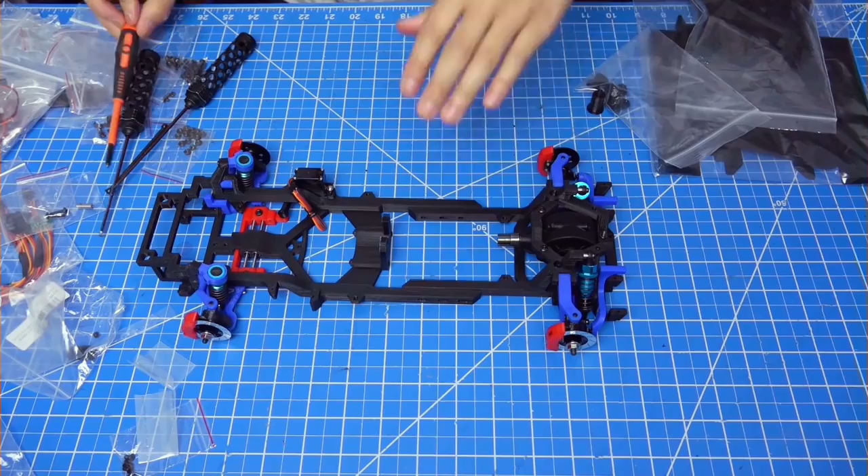Put the shorter ones in the front. And we're gonna have to grease this area right here.

Okay now guys, I'm gonna have to cut the body so that I can use it to measure where things should be. Oh, and I just printed out bucket seats. Somebody made this and put it on Thingiverse, so I'll put the link in the description.

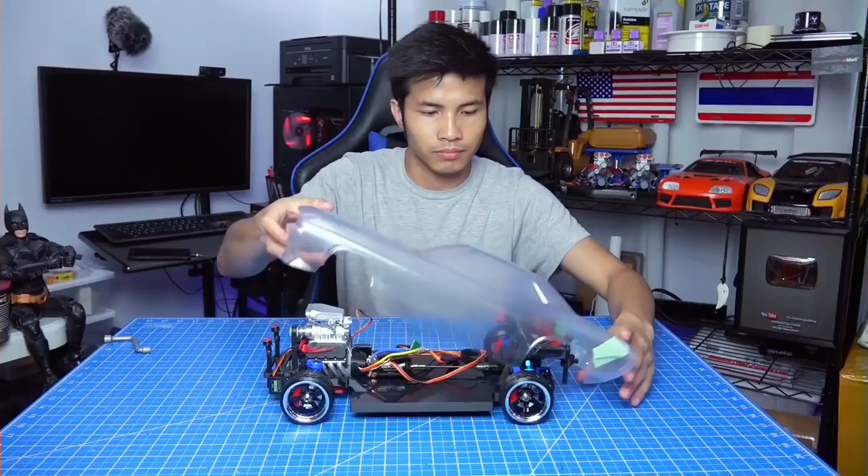This one's easy. I'm gonna warm this up with water. Perfect.

I'm gonna cut the front off and put on the mesh instead. I'm gonna open up the windows a little bit.

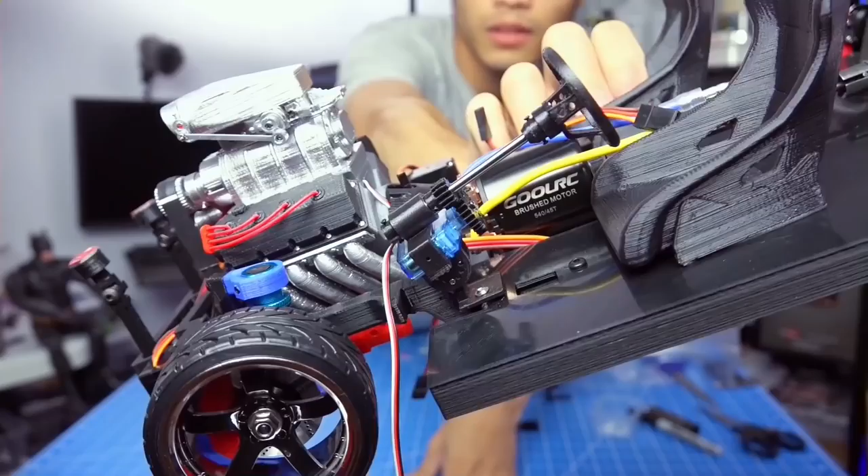And now I'm gonna make a roll cage for it.

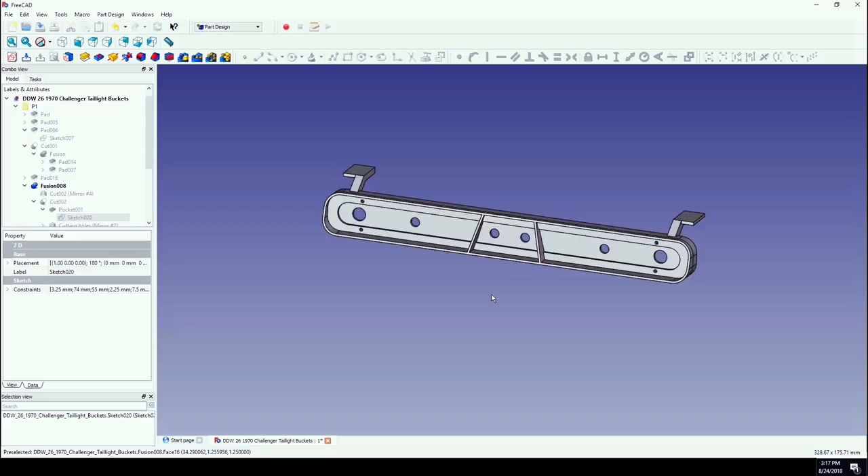I also made some light buckets. This car doesn't come with light buckets, so I have to make them.

And it is time to tape the windows, tail lights, and start painting. I'm gonna smooth the edges. Yeah.

I'm gonna clean it off a little bit with alcohol. PS5.

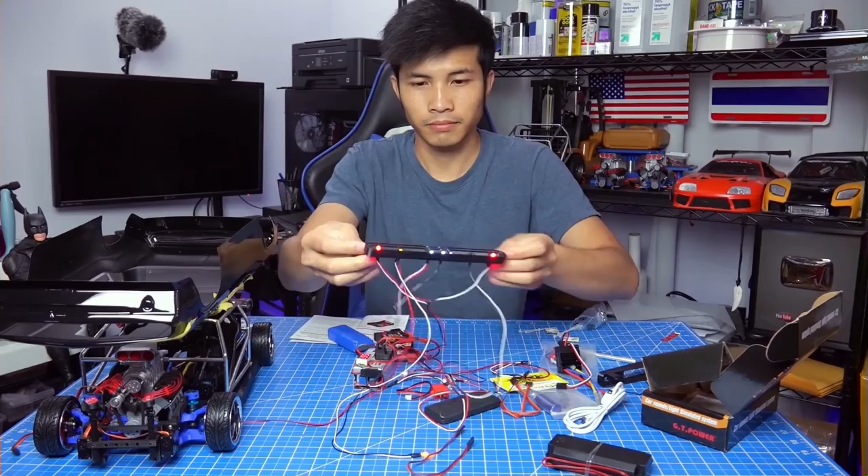These are the mesh mounts. I'm gonna drill holes for the turn signal lights.

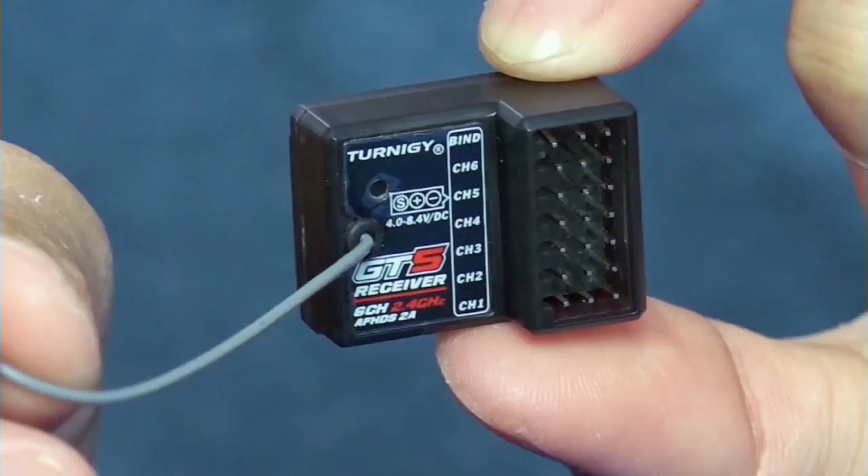I have to reverse the rotation. So instead of reversing on here, I'm just gonna switch the motor's wires.

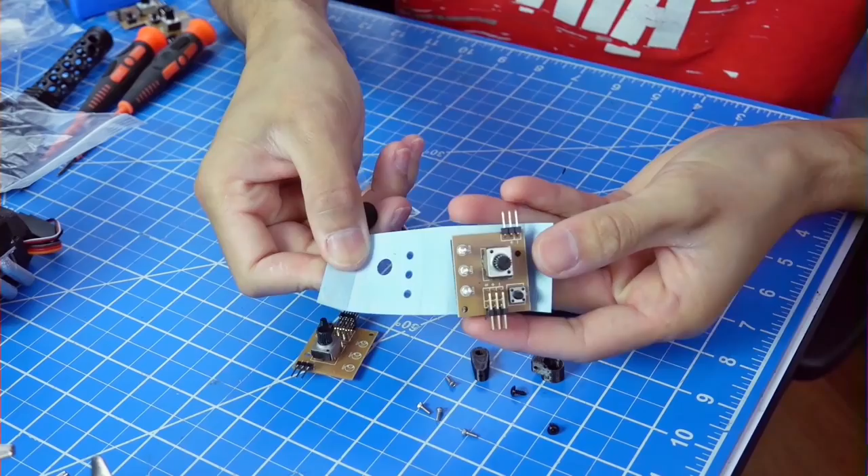I remove these LEDs out.

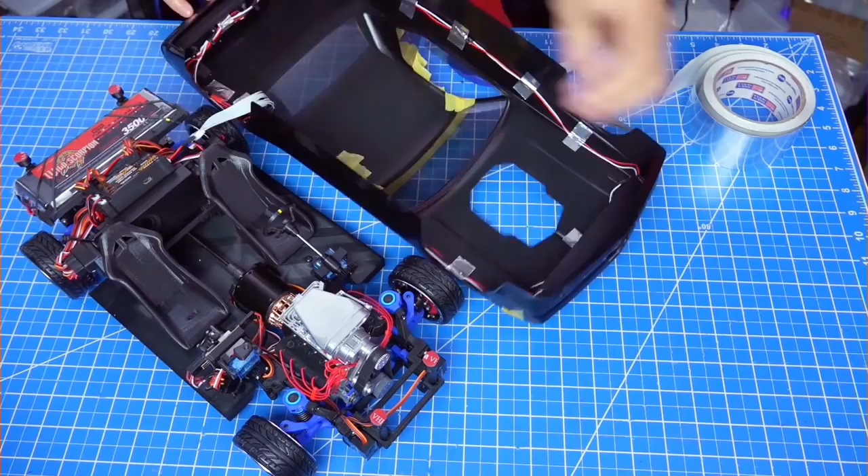And now I'm gonna make the engine kind of shake a little bit by using another servo.

And now it's time for nitrous tank and fire extinguisher. I'm gonna put them in the center, so I'm gonna make a cover for the axle here.

I also have seat belts or safety harness.

When that happens, it means there's not enough power. So I got a converter. This one is too big. I don't have a place for it, so I'm gonna try the small one.

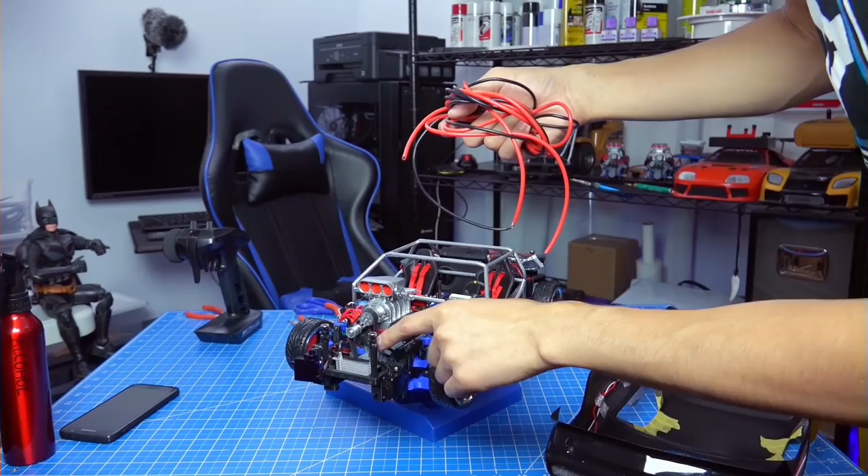It's time for some stickers.

To lift this RC car, you have to grab on the wheels, take out the body, and take out the battery.

The on and off switch is right here. There is a switch to turn on the engine right here.

This button will be the clutch. This one will be the engine. I usually turn this on while I press the throttle.